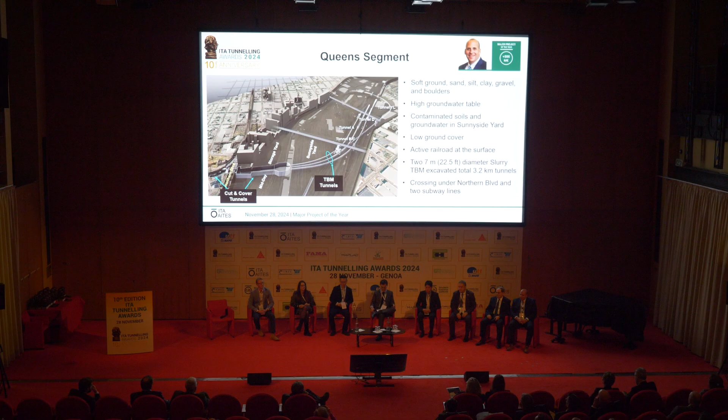Prior to the TBM tunneling, a significant geotechnical boring program was completed to better understand the geology in this area. Given that the geology was soft ground comprising sand, gravel, clay, and boulders, with a high groundwater table and the presence of contaminants, the project utilized 2 7-meter diameter slurry TBMs for the mining. Concurrently with the mining, the TBMs erected gasketed precast segments to complete the structure.

Between the 2 cut-and-cover segments of tunnel lies Northern Boulevard, which is a main artery in Queens for vehicular traffic. Additionally, at this location, there are subway lines above and below Northern Boulevard. Given these characteristics, a mandate not to impact train operations or the roadway, and the geology in this area, which was similar soft ground with boulders and high groundwater table, the team used the sequential excavation method of tunneling here.

While working from the adjacent access shafts, the team installed an array of horizontal ground freeze pipes and froze the ground for an initial groundwater cutoff and temporary ground support. Additionally, pipe pile supports were installed and a load transfer was completed to address the overhead subway structure loads during the excavation. Next, the contractor completed the excavation in 3 headings and 9 excavation drifts. A robust structural and geotechnical instrumentation program was utilized to complete this section of tunnel successfully.

In Manhattan, at nearly 50 meters below the street in virgin bedrock consisting of high-strength and abrasive Manhattan schist, several underground excavations were completed for the new train service. Coming out of the existing 63rd Street Tunnel, a new network of tunnels for a total length of 9.7 kilometers were excavated using 2 7-meter diameter gripper TBMs. The two tunnels bifurcated twice, allowing 8 tracks to enter the new station caverns.

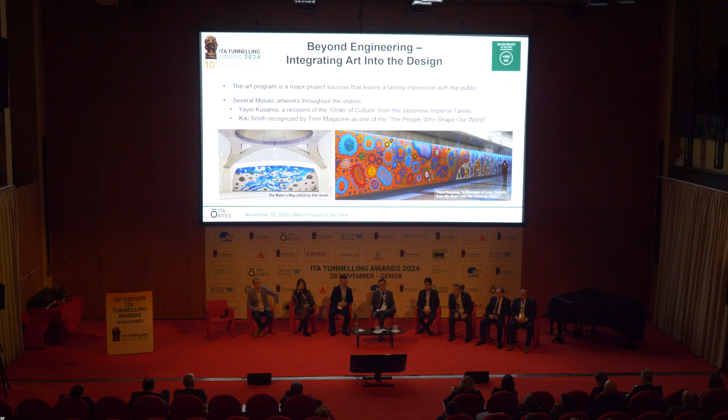In closing, Grand Central Madison typifies all ITA criteria, as it is one of the most complex and challenging projects completed in the heart of Manhattan. Realizing the original vision, decades in the making, Grand Central Madison is a regionally transformational transit terminal, offering a one-seat ride to and from Manhattan's East Side, shorter commute times, and enhanced economic development opportunities. This new terminal and its expanded transit service is truly a game changer. Thank you.

Outstanding project. Congratulations. So we move forward with the Singapore Thomson-East Coast Line. All right. Good afternoon, everyone. So I will bring you through the Thomson-East Coast Line project.

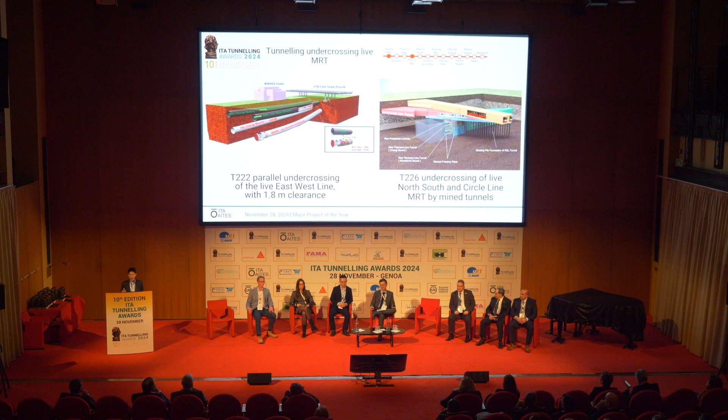We know that as we build more MRT network, inevitably more and more complex interfaces will come, such as, for example, parallel undercrossings of live tunnels with only 1.8 meter clearance. In another contract, we have to underpin or even undercross 2 live tunnels using a mined tunnel.

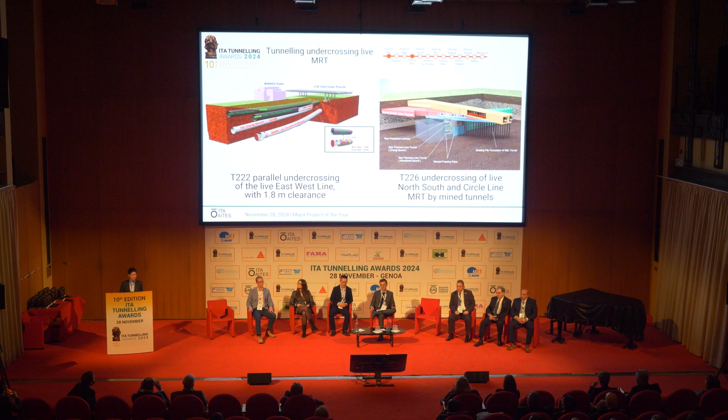So let's see, in one of the most challenging contracts, we construct 2 stacked mined tunnels and a pedestrian linkway above it, which is right beneath 2 live MRT stacked tunnels. Well, we just like to stack it up. But they are formed in soft clay and fluvial soil, so the settlement control here is critical.

So the innovative solution that we adopt here is we leverage on this future pedestrian linkway during construction, where it allows us access to remove the piles of the existing tunnels. It also creates the access for us to construct the ground freezing to facilitate the mined tunneling works. The 2 sections of the linkway are constructed using an open face rectangular TBM, with which we are able to underpin the tunnel above us. And we also install a row of pipes in order to form a ground freezing curtain to cut off the groundwater.

All right, now we move on to another contract. Similarly, we have tunneling under live tunnels, and it is also found in soft ground. So, in order to protect these tunnels, we install a canopy of 0.8 meter diameter pipe roofing using micro tunneling. Here, we also stack the tunnels under the roads as we have to avoid the cluster of buildings. So, we have a space constraint here.

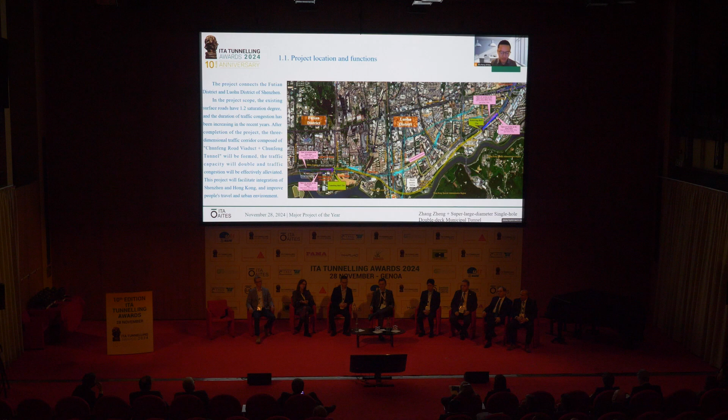The project is an EPC project, 100% invested by the government, and the total contract value is 580 million euros. The total length of the project is 5,078 meters, including 3.6 kilometers of shield tunnel. The total earthwork of this project is 1.16 million cubic meters, and the concrete cast in this project is 270,000 cubic meters. There are three major challenges in this project.

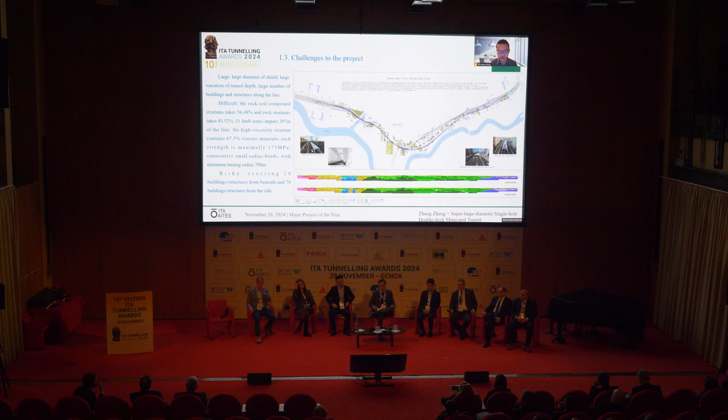This large shield and large burial depth is typical: long distance, soft and hard uneven, flexible, and high viscosity strata, and it's risky. It's passing under 28 buildings and structures and alongside 78 buildings and structures. Overcoming the impact of the small site through procedure simulation, module assembling, and other measures, our team took 38 days to complete the shield assembling and launching.

The project involving many pipelines and various kinds of building structures at the receiving end makes the receiving very risky, and our team used the short steel sleeve receiving for the first time in China, which is 2.5 meters long. Our team used the powerful intelligent big data platform for shield TBM to realize the intelligent tunneling of the shield.

Surveillance cameras and AI capture and warn of people's unsafe behaviors and unsafe conditions of objects. The whole construction cycle went through 2,640 days of zero accidents and zero casualties. Our team used BIM and GIS and other technologies to build a safety risk management and control platform to monitor and evaluate construction parameters, monitoring results, risk results, and other parameters in real time.

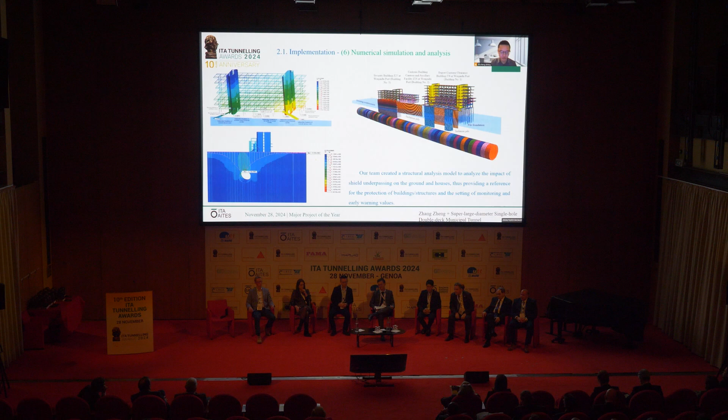Our team used automatic monitoring and wireless transmission of data for real-time viewing of building structures to provide data reference for dynamic adjustment of construction parameters and measures. Our team established a structural analysis model to analyze the impact of the shield passing on the ground and houses, to provide a reference for the protection of building structures and the setting of monitoring and early warning values.

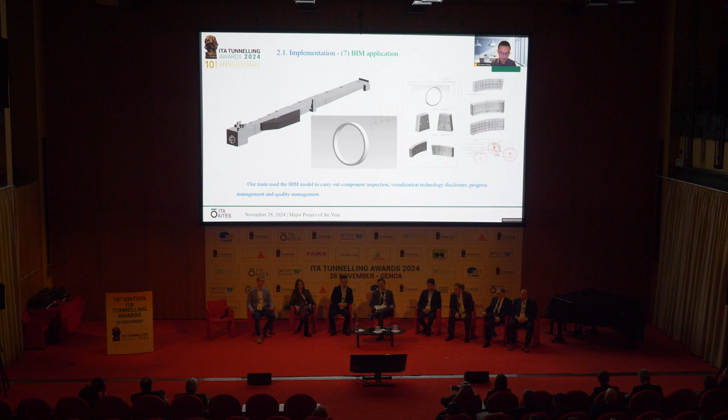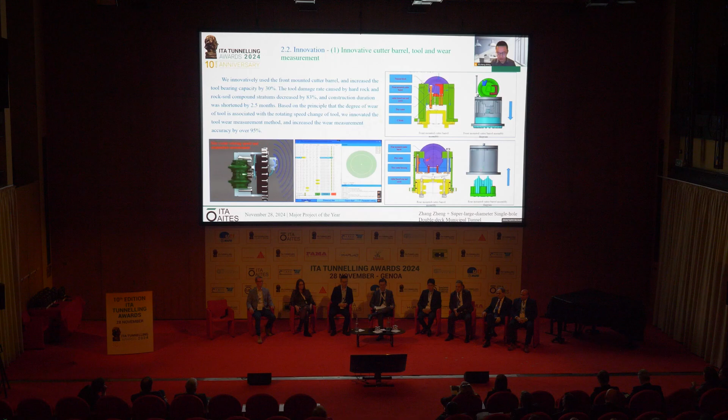Our team used BIM to carry out component inspection, visualized technical disclosure, progress management, and quality management. Our group also pioneered the front-mounted cutter, which increased tool carrying capacity by 30% and reduced abnormal tool damage by 83%, and innovated tool wear detection means with accuracy of wear detection reaching more than 95%. The shield shell mud injection can achieve precise control of settlement, ensure simultaneous grouting fullness, and control segment floating.

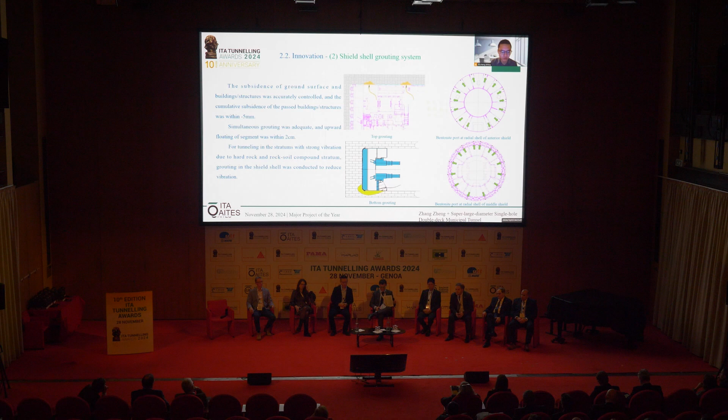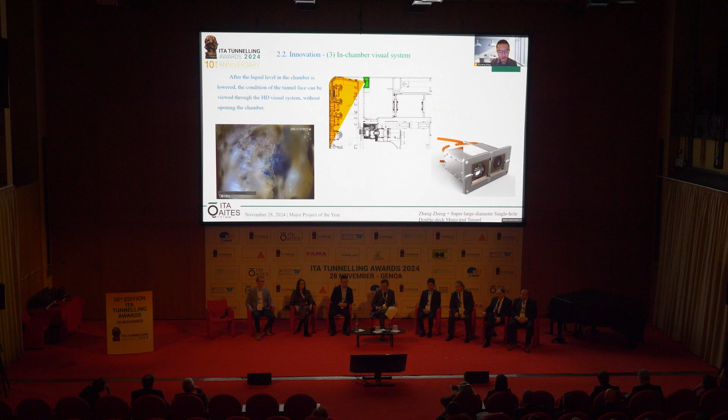The high-definition visual system achieves the view of the tunnel face without opening the partition by lowering the liquid level. About 210,000 cubic meters of shield muck was processed to realize resource utilization, of which fine sand can be used as raw materials for simultaneous grouting, with a dosage of about 62,000 cubic meters.

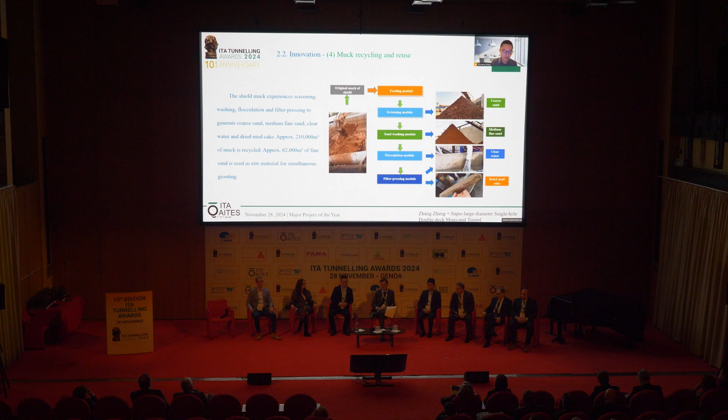The prefabrication and assembly rate of the tunnel reached 78%, and the excavation and assembling construction was synchronized, saving the construction schedule about half a year. The tunnel was built into a single-hole double-deck structure, realizing two-way traffic flow and increasing the utilization rate of the tunnel space by 50%. The hanging pipeline design made the tunnel clean and beautiful, and the centralized arrangement facilitates inspection and maintenance during operation, reducing work load by 20%.

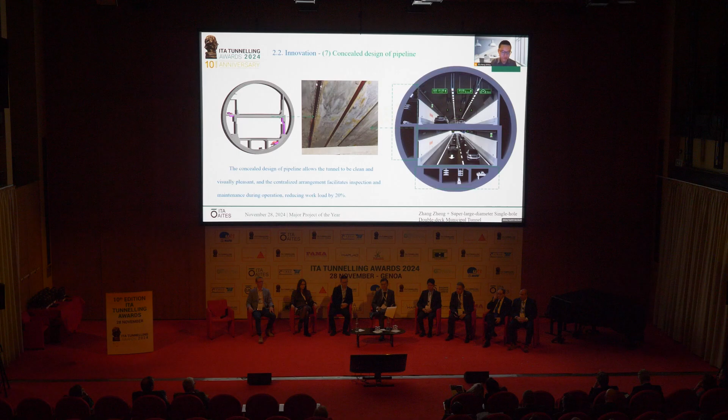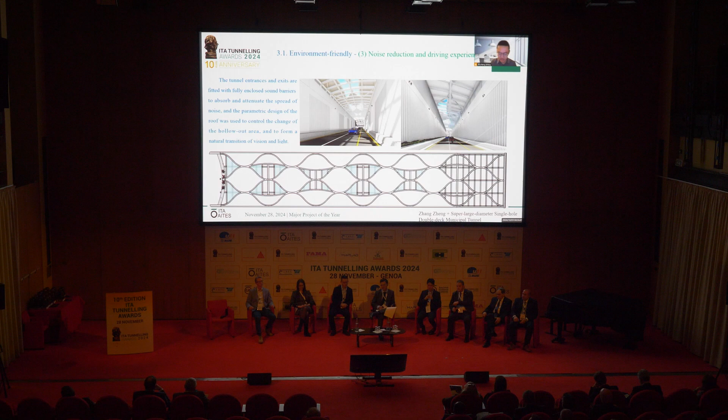The air purification system inside the tunnel effectively removed particles and harmful gases and improved the urban environment. Adhering to the concept of smart city, the ground facilities were renovated, and 30,000 square meters of public spaces were released after the reconstruction to provide citizens with leisure places. The tunnel entrance and exit are fully covered by sound barriers to absorb and reduce the spread of noise, and the roof adopted a parametric design to form a natural transition of view and light.

Our team provided faster and more efficient traveling options, shortening the travel time by about 20 minutes. The project has been awarded many certificates and letters of commendation by the clients and industry authorities, with good evaluation from all parties. The project has obtained a series of innovation patents.

Through the innovation of technology, the practical application effect is really good. I would like to appreciate the team and all participants for their dedication, support, and encouragement. The Chunfeng Tunnel is a high-profile super project changing the status quo and creating the future.

Okay, we move to our final project, the Thames Tideway Tunnel. Thanks. Good afternoon, everyone. As you know, I'm here to talk to you about the Thames Tideway Tunnel, which is a super sewer in London. The super sewer is the UK's single greatest intervention to tackle sewage pollution in the UK. And it's the biggest in London since Bazalgette's original system was built in Victorian London.

How has this been done? We've done this by driving a 25-kilometre long tunnel connecting 24 sites, which all sit above ground in densely populated urban environments. And we've done this using 6 TBMs through London's different ground conditions. At each of these sites, we capture flow which would otherwise go into the River Thames, capturing 30 million tonnes on an average year.

Tideway set out with the ambition to reconnect London with the River Thames. Tideway was set up as a licensed water company to deliver and operate the new system. This is a new model for UK infrastructure. The delivery of the programme has been supported by alliance partners, Jacobs as the programme manager, and 3 joint ventures made up of 8 major construction companies from across Europe.

Commissioning began in May this year, and on just one day in September, we were able to capture 700,000 metres cubed on a wet day before the project has been finished and with only a few small sites connected and live.

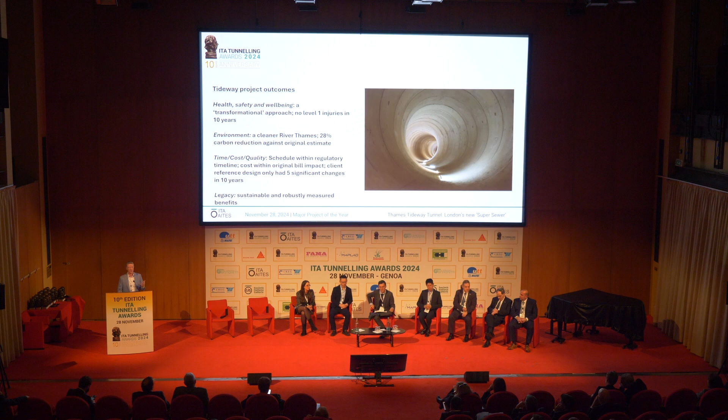And in terms of the quality, the client reference design has had only 5 significant changes in 10 years, which is pretty remarkable. And I've already covered this point about legacy, which is not just what we're leaving behind in terms of a cleaner river, but the things we're doing on top of that, not just above ground, but also in how we've created a culture within the organisation to encourage innovation.